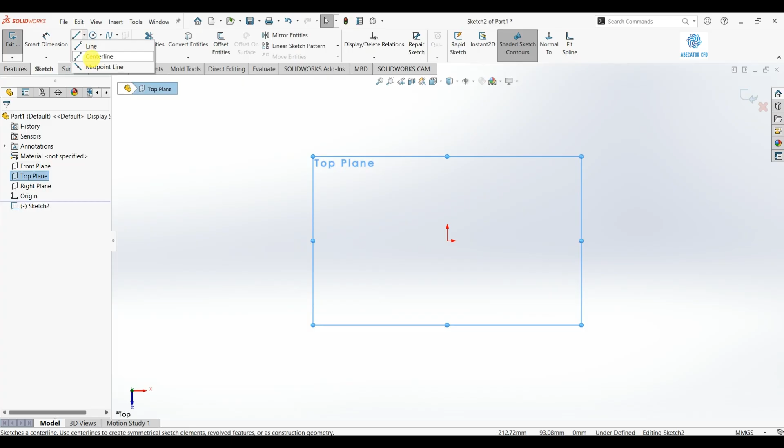Let's start by creating the first part with a vertical centerline. Create a shape like this first.

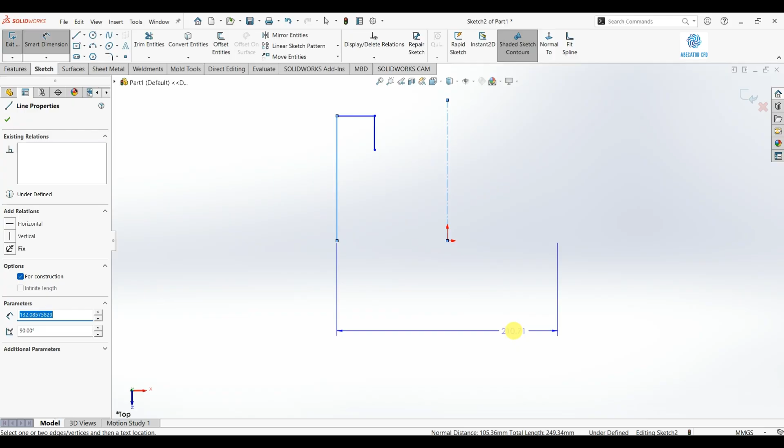Now let's add the main dimensions. Set this mirrored overall distance to 150 millimeters. We do that because we want to build the other side with mirror.

Now set the size of this section. Make this segment 30 millimeters and set this gap to 35. Also set this distance to 70 millimeters.

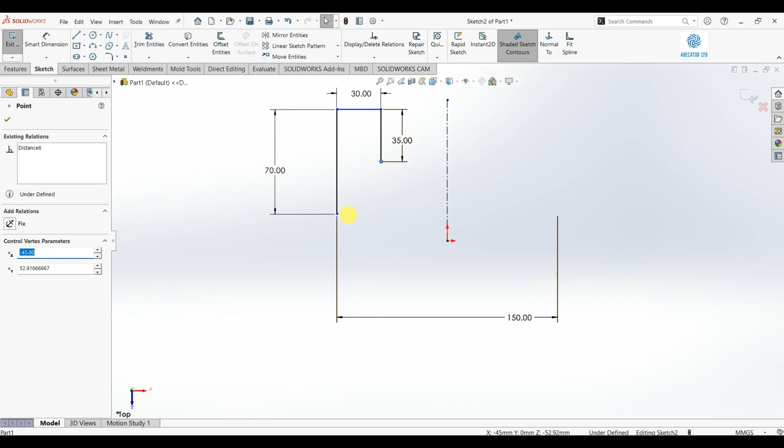Right now, this sketch is still underdefined. Select this point and the origin, then add a horizontal relation. That will fully define the sketch.

Then choose Mirror Entities. Select these elements and mirror them about this center line.

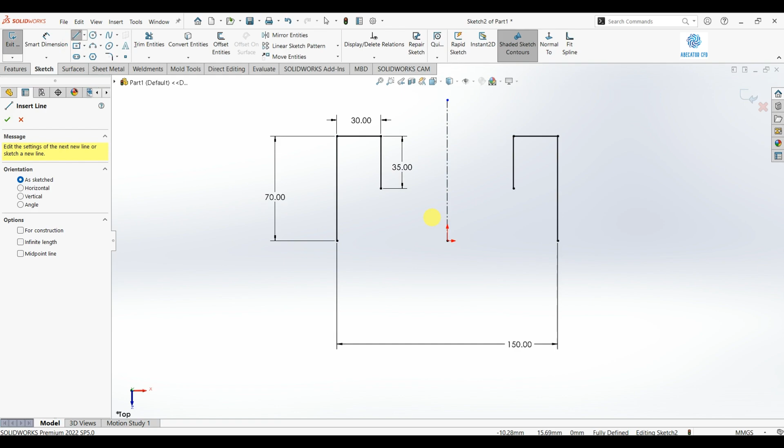Now use the Line tool and connect these 2 points. Then connect the other 2 points and choose Extruded Boss/Base. Set the thickness to 10 millimeters.

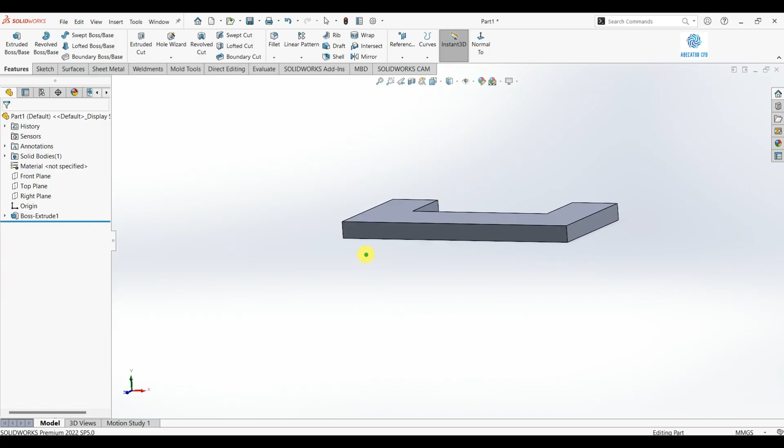Next, let's add fillets to these corners. Select this edge first and set the fillet radius to 10 millimeters. Then select the other edge too.

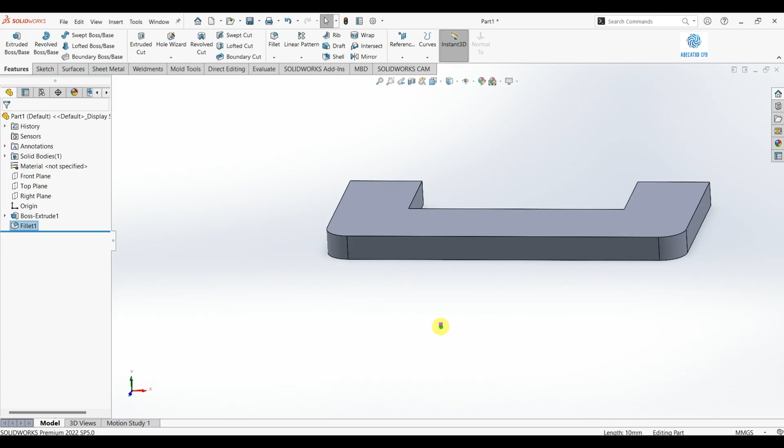Now let's create a hinge here. Start a new sketch on this face.

Now we will build the hinge. First, make sure the plane is correct. Press Ctrl if needed and continue.

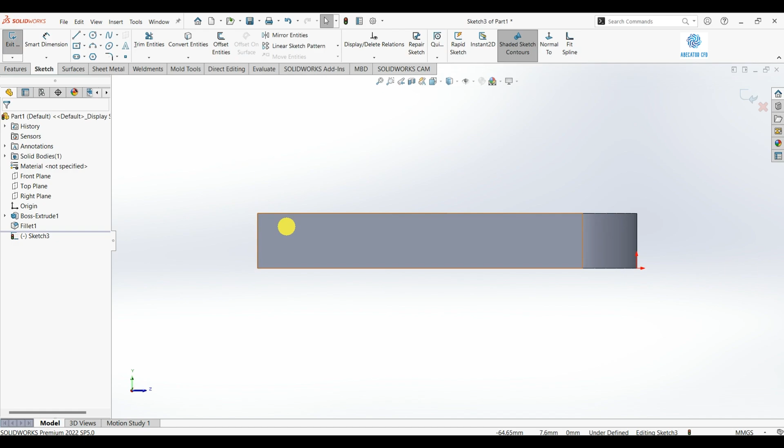Here we want to sketch the hinge profile. Draw a vertical line here, then return to the first point with an arc. Create the arc like this.

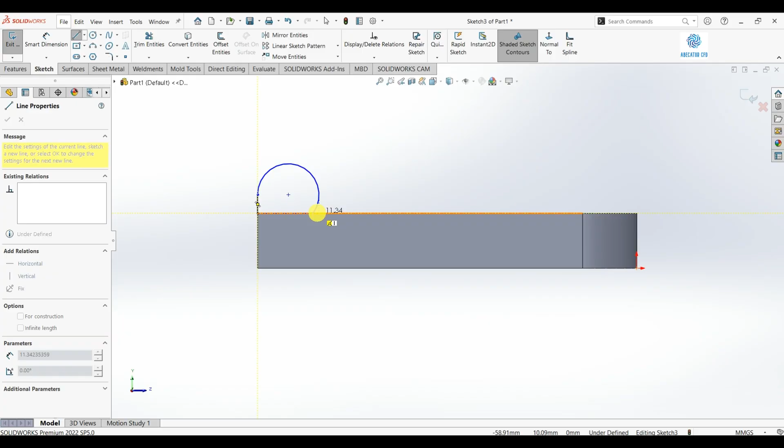Then draw another line from here to this point. Set the arc radius to 5 millimeters. Set this length to 8 millimeters.

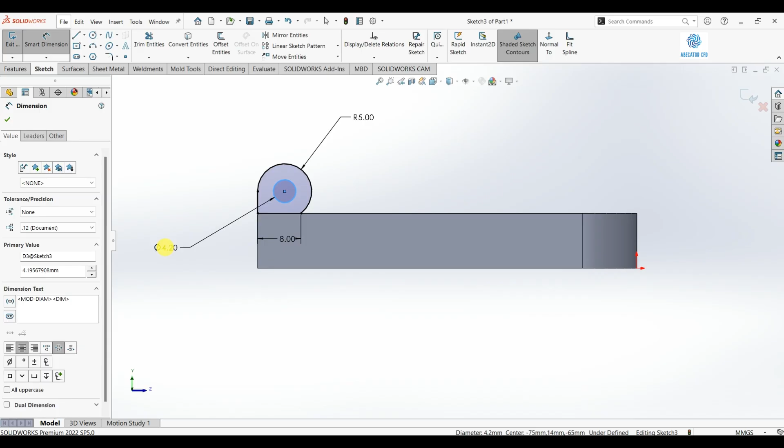Also create a hole here with a 5 millimeter diameter. Now choose Extruded Boss/Base for this sketch.

Set the end condition to Up to Surface. Select this surface and click OK.

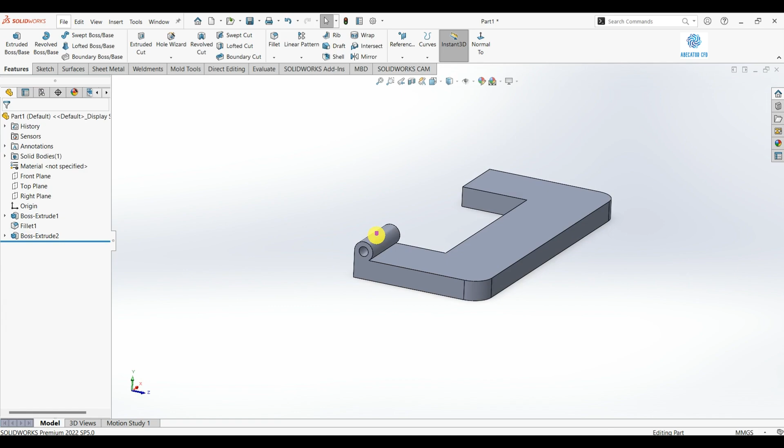Now we need the same hinge on the other side. Choose Mirror, because we want the same hinge on this side too.

We need a plane that passes through the middle of the model. The right plane works well here, so select it in Mirror Face/Plane.

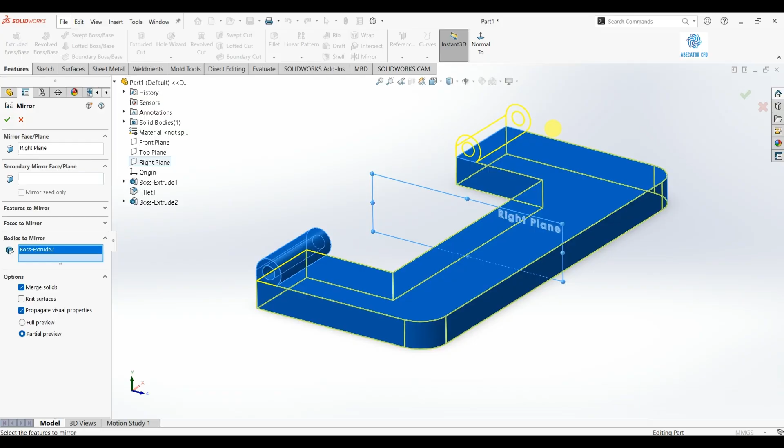Then choose Bodies to mirror and select this body. You can see the preview, and then click OK.

The first part is now finished. Let's assign it a color too. Set this part to blue, and then save it.

Create a new folder here, and save this file as part 1.

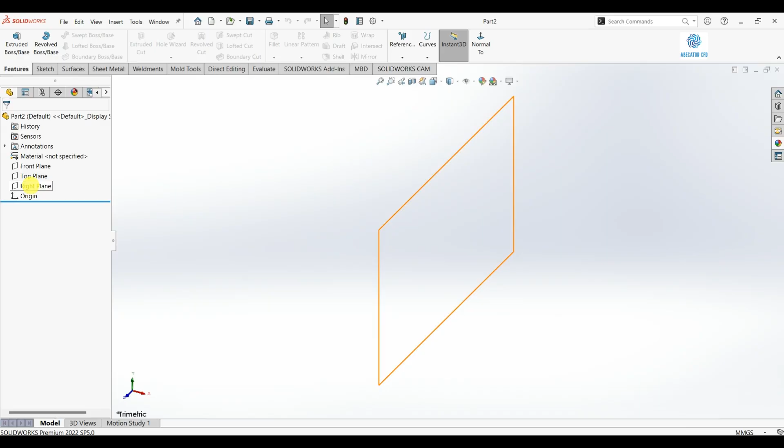Now let's move on to the next part. Create a new part, choose the top plane, and start a center rectangle.

Set the width to 35 millimeters. Set the length to 90 millimeters, and then create the solid.

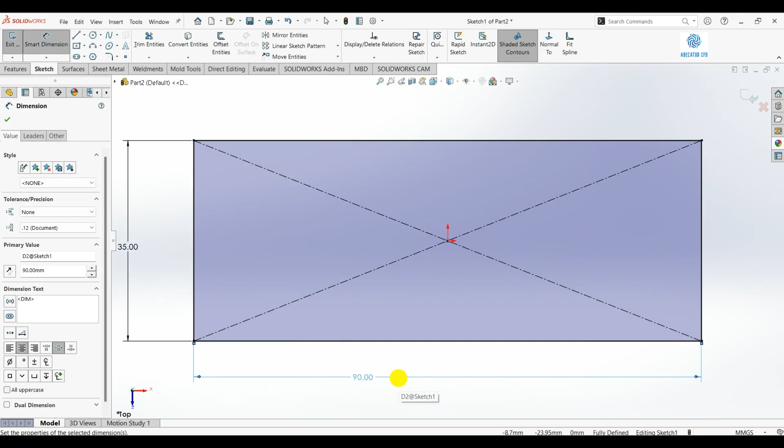Choose Boss Extrude here. Give it a thickness of 10 millimeters.

This part also needs a hinge. Start a new sketch here and build it like the previous hinge. Follow the same method and return with an arc shape.

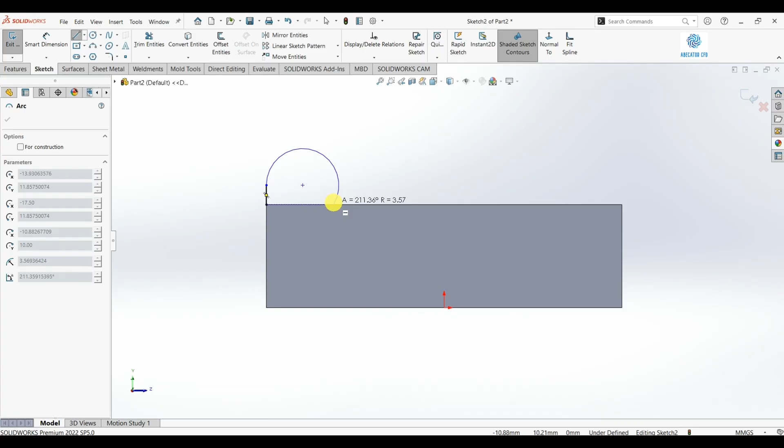Create the arc here now. Then add this line. The arc radius is 5 millimeters.

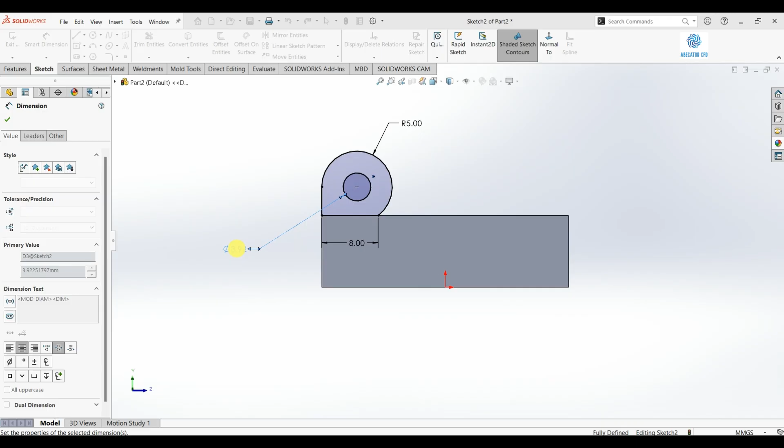Set the line length to 8 millimeters and add a 5 millimeter hole. Then choose Extruded Boss/Base and use up to surface again. Select this surface. That completes our second part.

Now assign a color to it. For example, make this one yellow. Then save it as part 2.

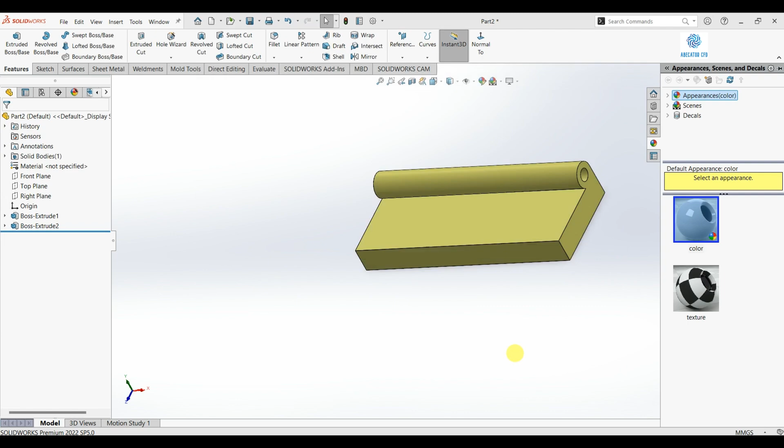One more part is still left. Let's create that part 3, and then move everything into the assembly environment.

Select the front plane and draw a horizontal center line as the axis. Now sketch a profile like this.

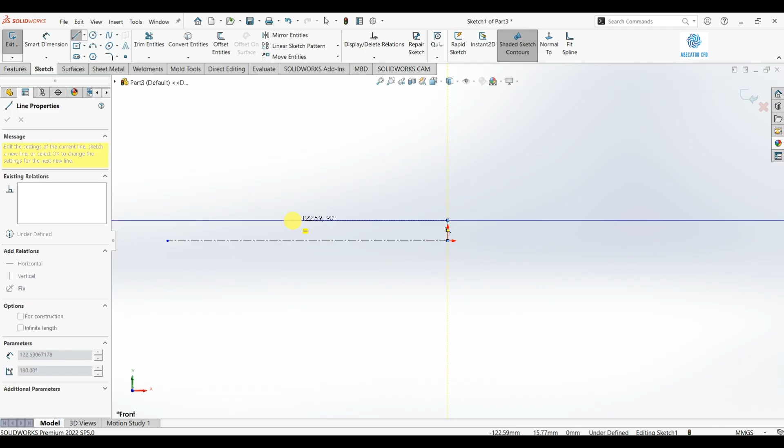Once that is done, let's add the dimensions. Set this length to 150 millimeters. Set this offset from the center line to 5 millimeters.

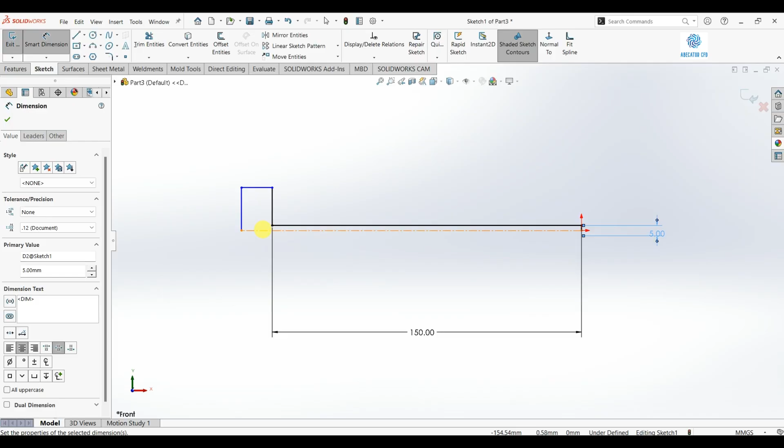Make this segment 5 millimeters long. Also set this distance from the center line to 7 millimeters.

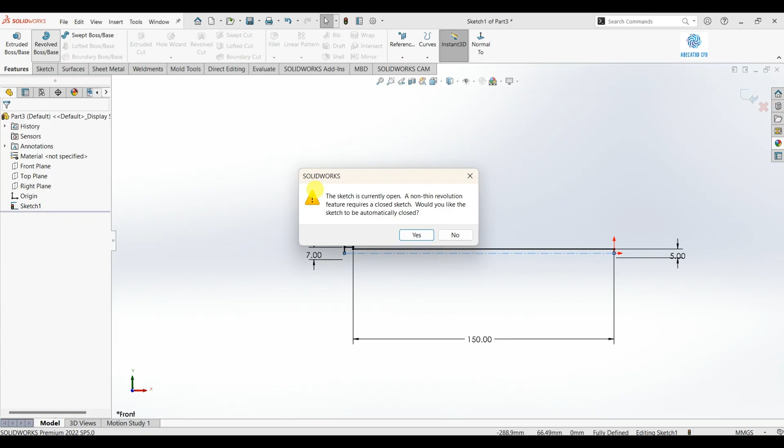Now use Revolved Boss/Base. Click Yes, and create the shape. That gives us this geometry.

Now let's give it a color too. Choose a light blue color and save this file as part 3.

Now click New and enter the assembly environment. Here you can see the parts we created.

Now let me explain an important point about the first inserted part. As we said before, the first part in an assembly is fixed and cannot move. So it is better if that first part is your base part.

Let me show you that now. As you can see, this part cannot move.

We also have the main assembly planes here, and this is the assembly origin. The inserted part also has its own planes, and it also has its own origin.

The best practice in assembly is this: take the base part origin and align it with the main assembly origin. Give those two origins a coincident mate so they match exactly. That will help a lot later during the assembly process.

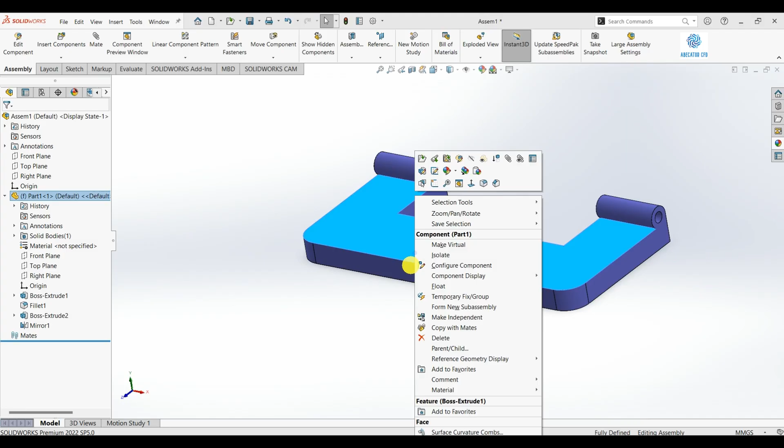First, we need to remove the fixed state. Right-click the part and choose Float. Now it can move. Then select this origin, hold Ctrl.

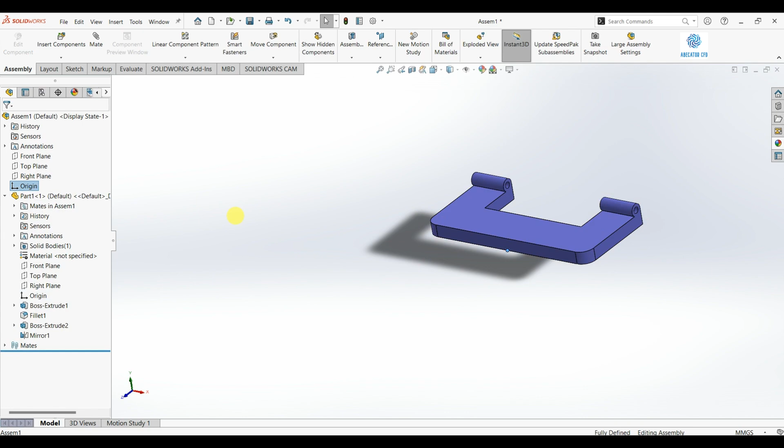Select the other origin too, and then choose Mate. SolidWorks will automatically apply a coincident mate here. Now the part is fixed again, and both origins are aligned.

The main reference planes are aligned too, and that makes assembly easier. There is also a second way to make these origins coincident. Let me show that method too.

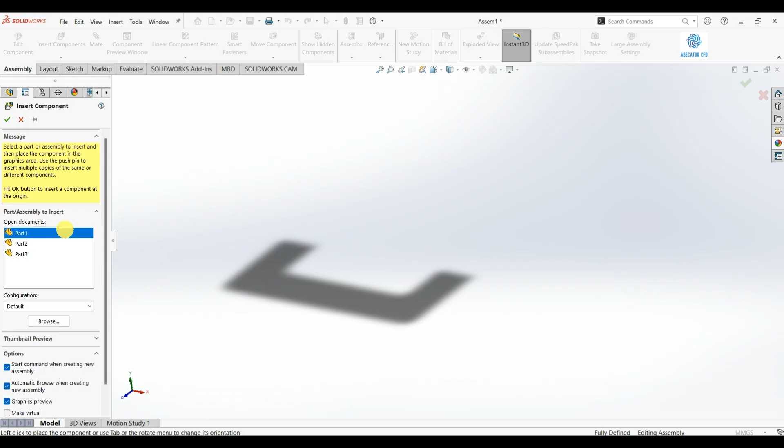Insert part 1 again. Select part 1 here. In this area, you can show the hidden items. Turn on View Origins here. Now the origin point is visible.

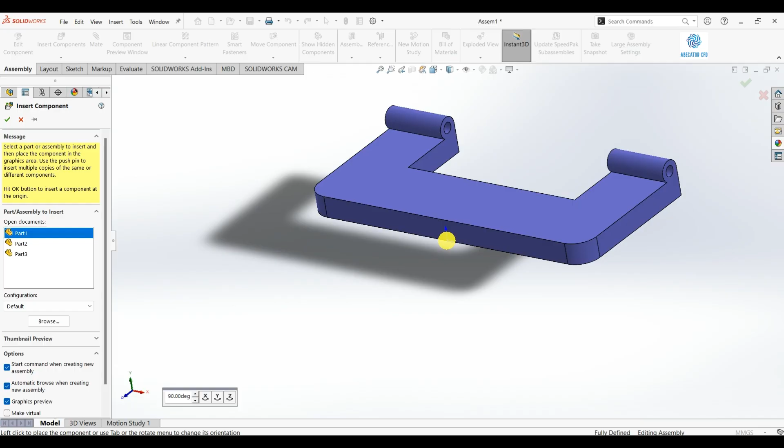You can insert the part directly onto that origin. If you click there, the part origin will match the assembly origin automatically. As you can see, the origins and planes now line up correctly.

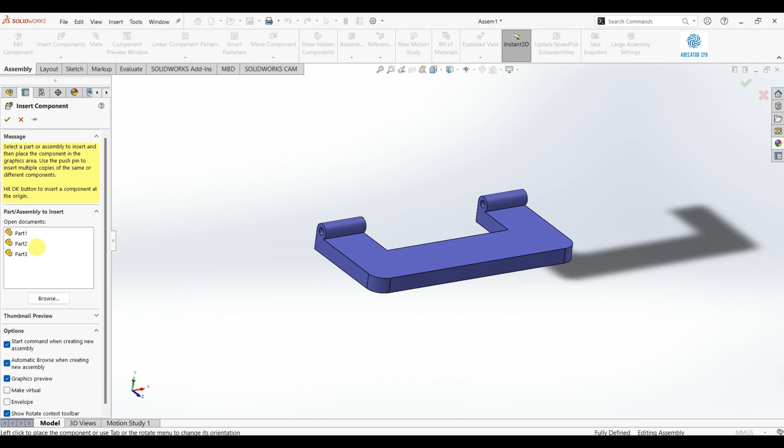So you can use this method too, and then hide the origin again. That was the point I wanted to mention. Now let's insert the other parts as well, including part 2 and part 3.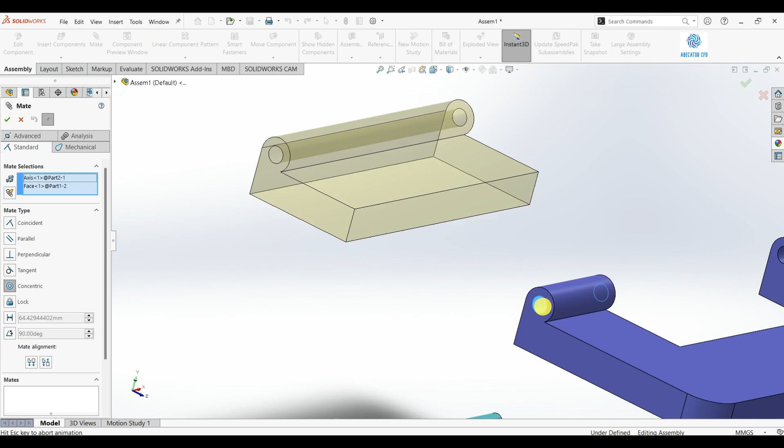Now look here carefully. This hinge must be concentric with the other hinge, so choose Mate. Select the inner cylindrical face of this hinge and then the other one. SolidWorks gives it a concentric mate automatically.

Click OK. Now this part must sit exactly in the middle of the other part. There is a mate for that. Click Mate, then go to Advanced Mates. There you will find the Width Mate, which makes this much easier.

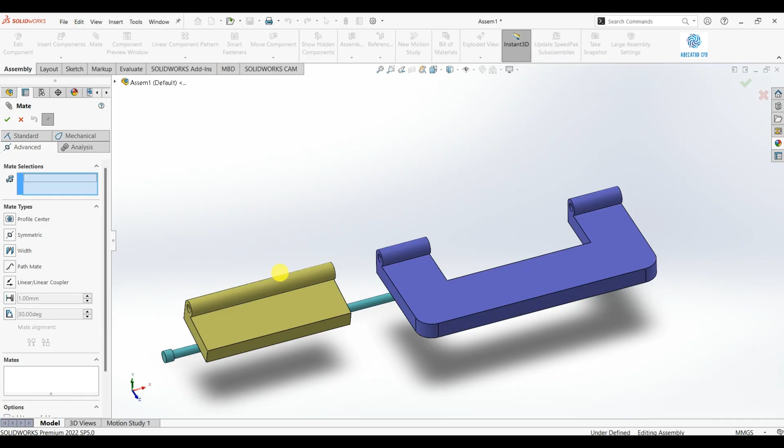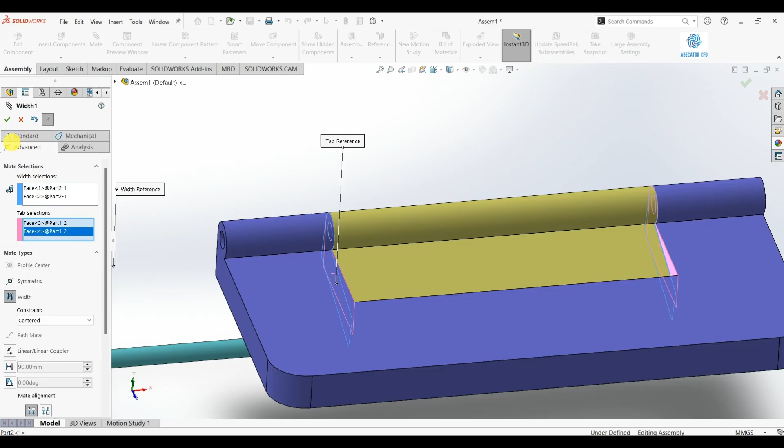In the first row, select these two opposite faces. Then in the second row, select these other two faces. Now the part moves exactly to the center of the geometry. Click OK, and it is fixed in place.

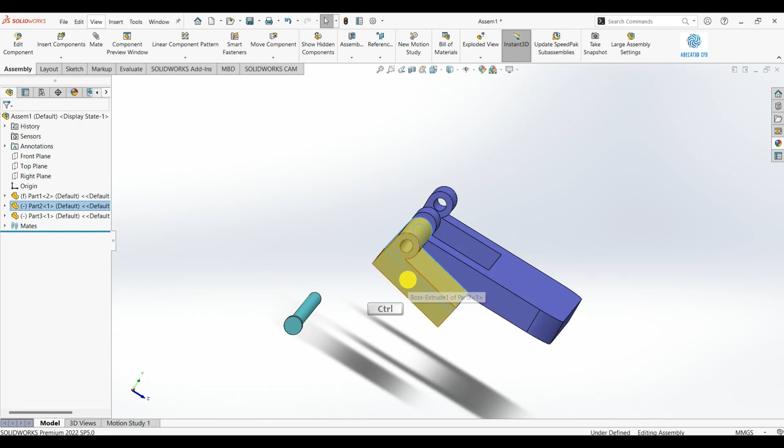There is another way to create the same width mate. You do not even need to open the Mate command first. Hold Ctrl and select this face, then this one. And then select these two faces as well.

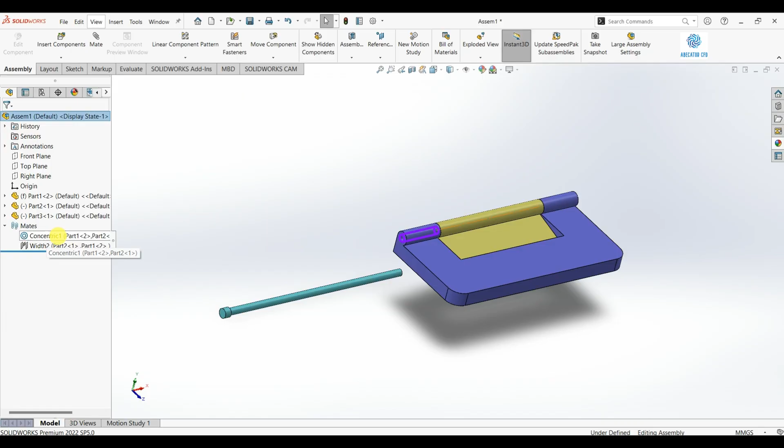When you click Mate, SolidWorks will suggest the width mate automatically. Click OK. Now if you look at the mates, we have one concentric mate and one width mate.

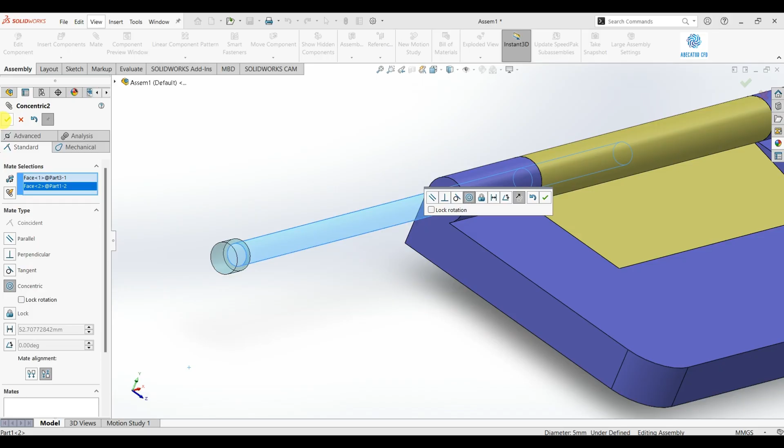Next, let's align this pin with the hinge hole as well. Open Mate again, select this cylindrical face. And then select the hole. That creates a concentric mate.

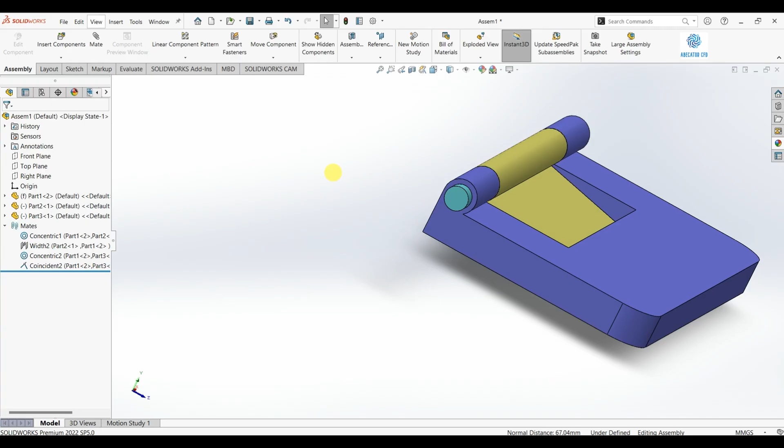Now this flat face must also be coincident with the other face. Select both faces, click Mate, and SolidWorks applies Coincident. Now you can see that this part is free to rotate 360 degrees.

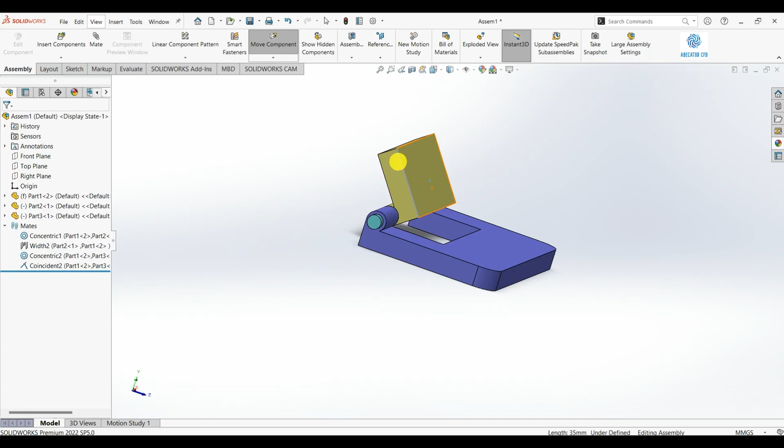But we also have a mate that can limit that rotation. For example, we may want it to stop at 90 degrees and go no farther. Let's try that now. Open Mate again.

There is a standard angle mate, but that fixes one exact angle. For example, set it to 90 degrees. Select the second face, confirm 90 degrees. And let me show it once more.

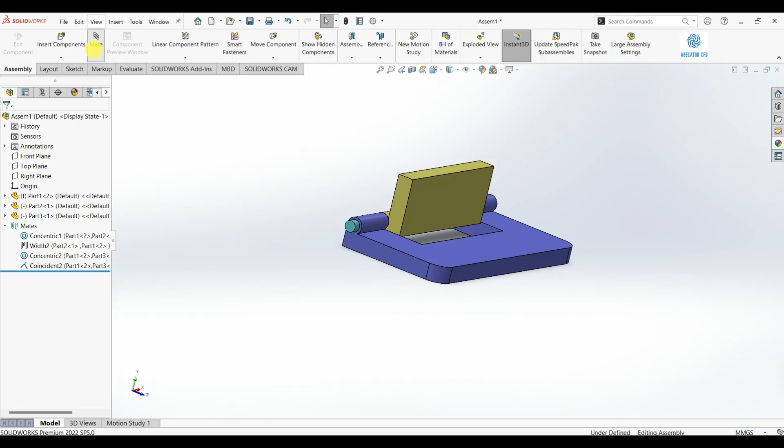Choose Mate, select the first face, set the angle to 90 degrees, and click OK. Then select the second face as well. Now you can see it is fixed at 90 degrees and cannot move anymore. We do not want that, so let's delete this mate.

Instead, go back to Mate and open Advanced Mates. Enable the Limit Angle option and then select the two faces. I will use these two faces here. Now choose the Anti-Aligned option here.

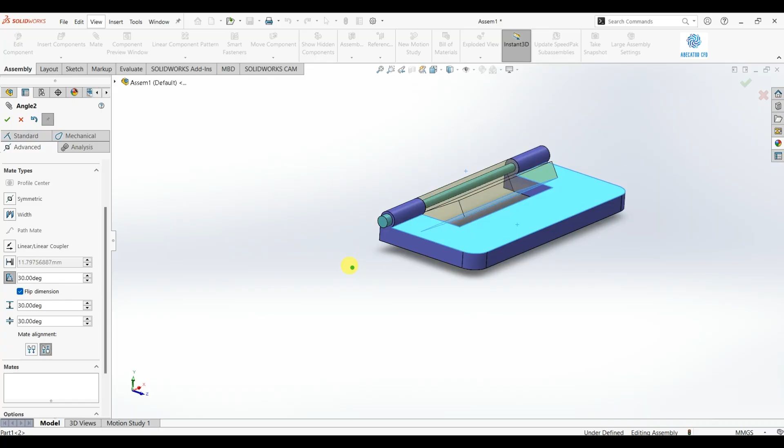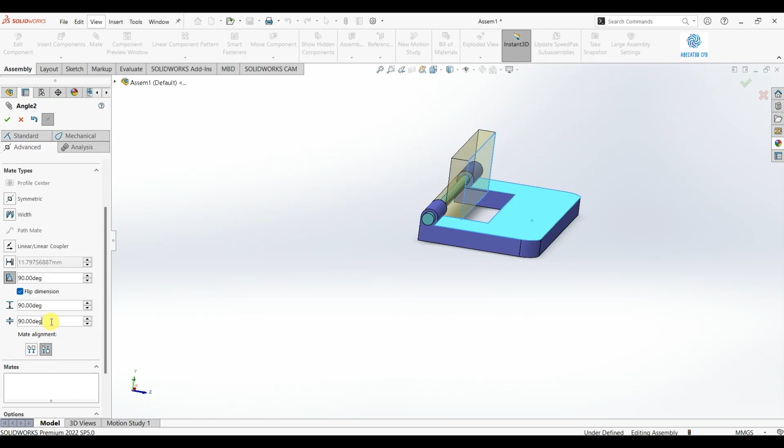Then set an angle value, for example 90 degrees. Here you can define both the minimum angle and the maximum angle. For example, I want the maximum angle to be 90 degrees, and the minimum angle to be 0 degrees. Then click OK.

Now you can see that this part can move only within that range. So now it rotates only between 0 and 90 degrees. You can also change this limit angle value.

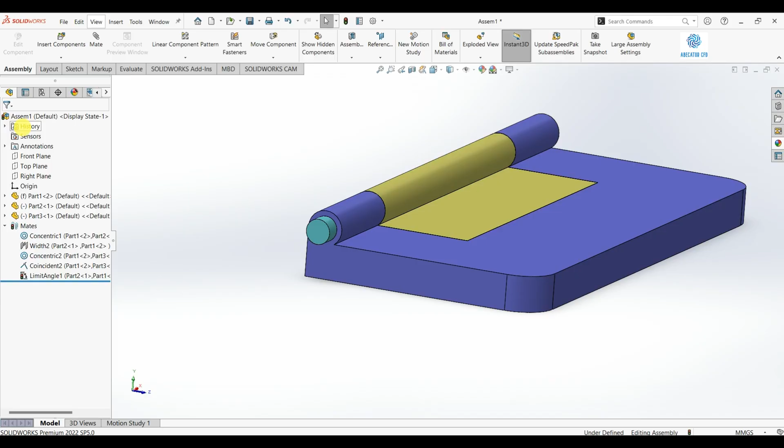For example, set it to 180 degrees and click OK. Now it can rotate only between 0 and 180 degrees. So this is how you use mates to limit the motion of the geometry.

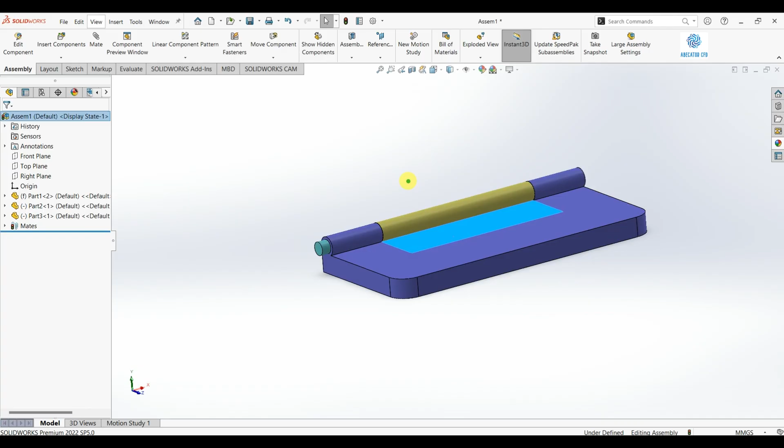That was today's exercise. In the next video, we will work with linear component pattern and copy with mates.